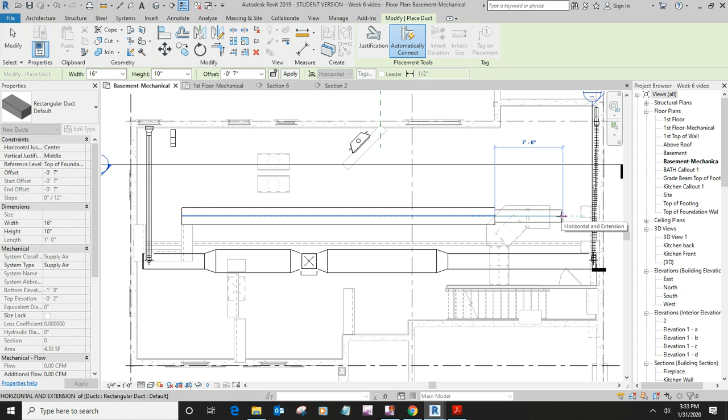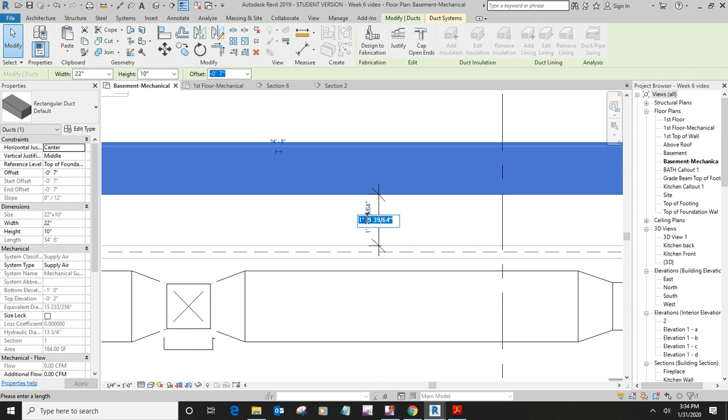Okay, and so I put my transition in. Now I need this to be off the edge of my beam. I need that to be about 4 inches off of the beam. No closer than that.

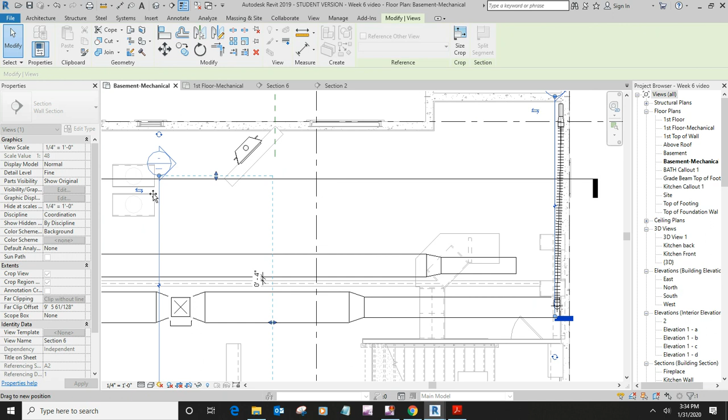All right, let's see, where's my sections at? So you can see that, about 4 inches, no closer than 4 inches off of that. All right, so now I want to put a vertical duct coming down, and we're going to do an elbow and then come into a piece of vertical duct underneath here. And we'll have the same problems that we had earlier, for sure.

So let's start with our vertical piece here. And that should be a 24 by 20, yeah, because the bottom of the furnace, we're going to go with a 24 by 20.

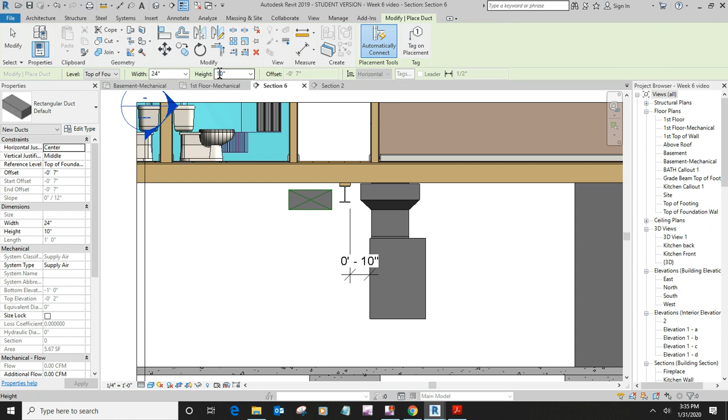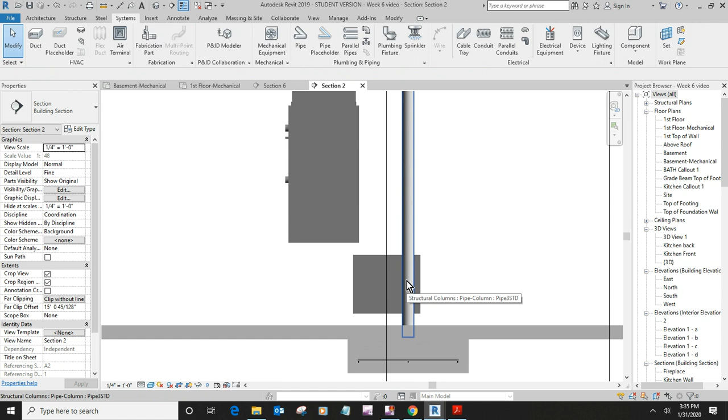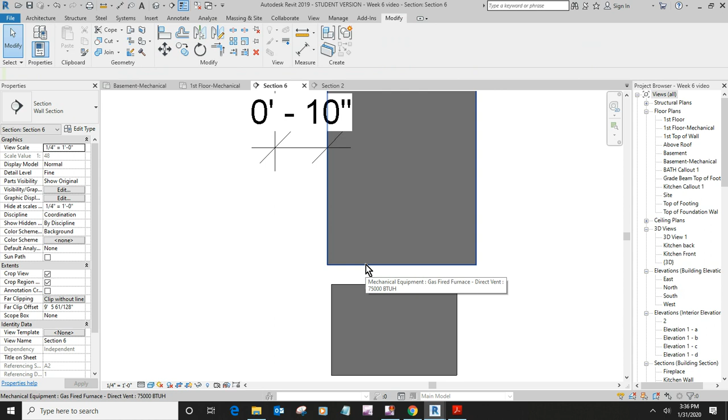And I'll pick the connect point, but then I'll come down below it a little bit and come down like so. Now I want to check my other section. All right, and I'll go back to this section. Ooh, that lined up pretty close. Okay.

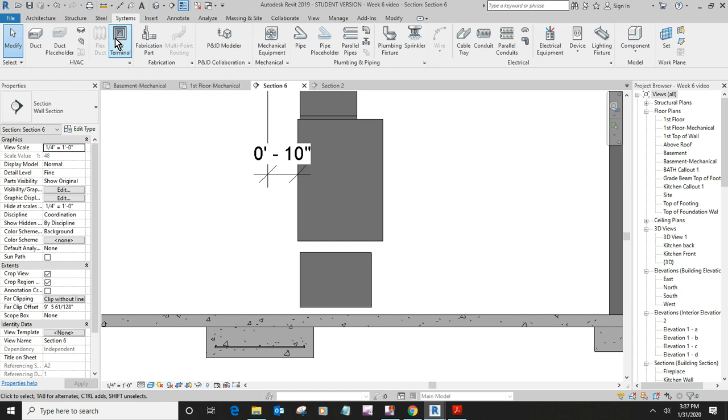Now let's drag it down, and we'll go ahead and put a cap under it. Oh, and I had trouble with this thing. I kept having trouble with it wanting to snap to the other end of it. So I had to physically place one and then just join them together.

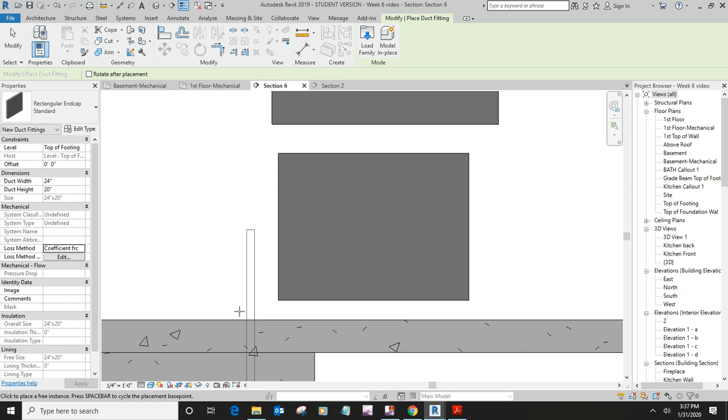So we'll make it 24 by 20. And instead of attaching it to the duct, rotate after placement. There. And now we'll do some alignment in that I want it actually on the floor.

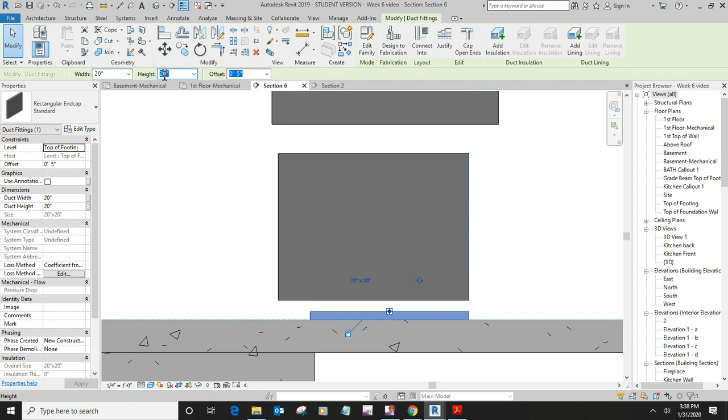Okay, so now I need to change my size on it, because of the way my duct is, and make it a 20 by 24. There we go. I didn't check my other section.

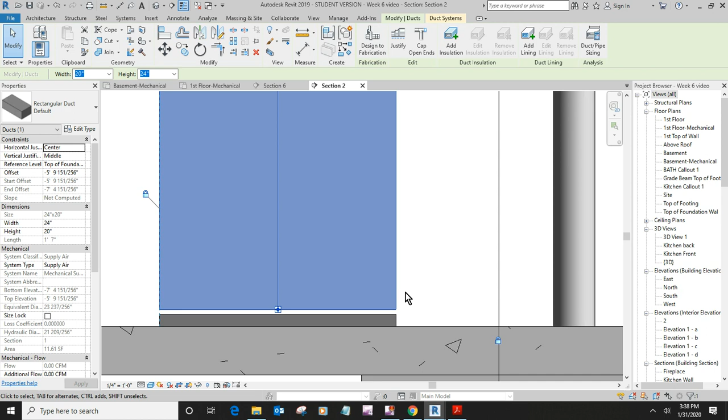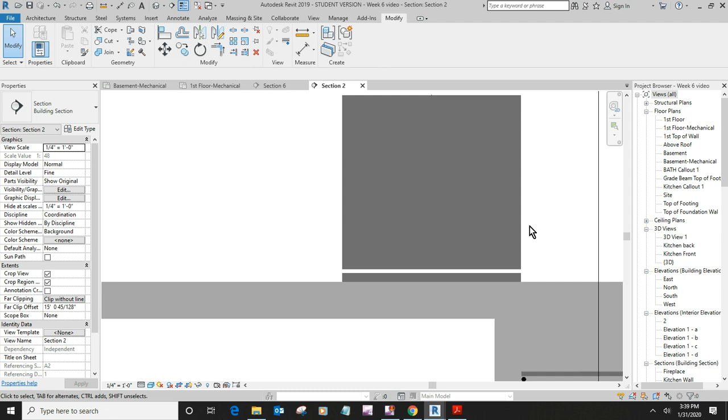I don't know why it did that. Constraints not satisfied. Because it keeps wanting to put it up on the very top. Okay, so good old align tool.

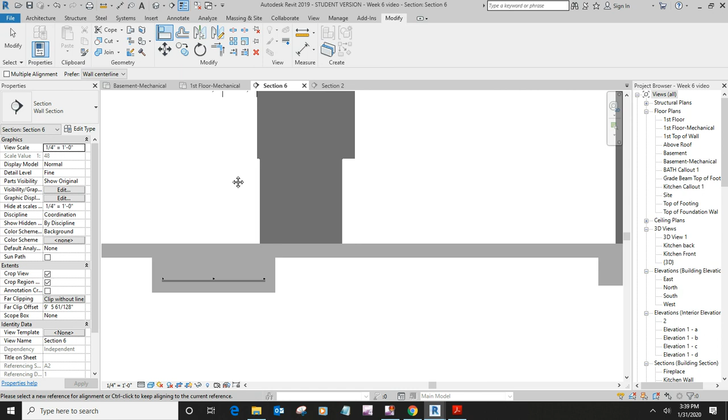And I know if you talk to somebody that does HVAC design in Revit, they're going to laugh at me and tell me how stupid I am. But we're rolling with it. All right, okay, so now we've got that done.

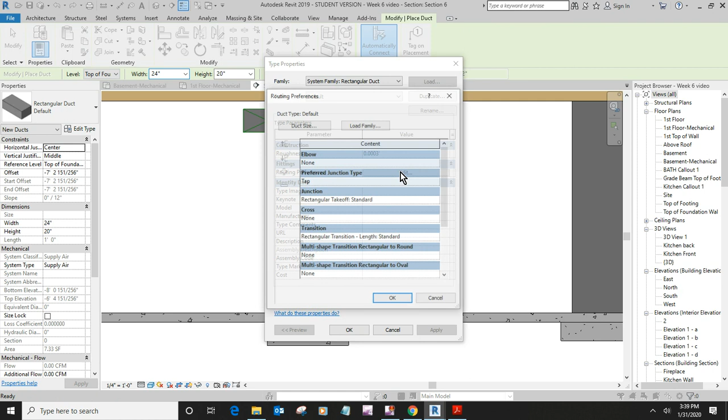Now we're going to pull a piece of rectangular duct down, come down and do a 90-degree turn and come over, and then we'll drag it into that and connect it. So let's go duct, rectangular, and let's edit our routing preferences. And we're going to add an elbow to it now.

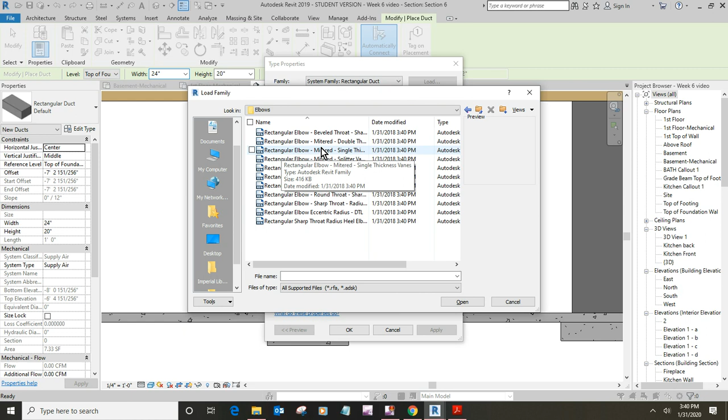Got a load of family. Duct, went too far. Fittings, rectangular, elbows. And I want this one because I like that one. It's a mitered single wall. It worked good for me. So I'm going to choose a rectangular elbow mitered single thickness vanes and add it to there and go okie dokie.

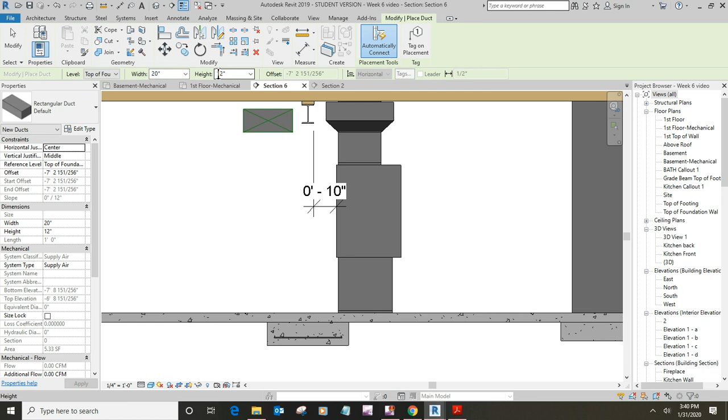Okay, and my size, let's see, I'm going with a 20 by 12. Let's see, maybe it should be a 12 by, yeah, it should be a 12 by 20. There we go. And I will start it there.

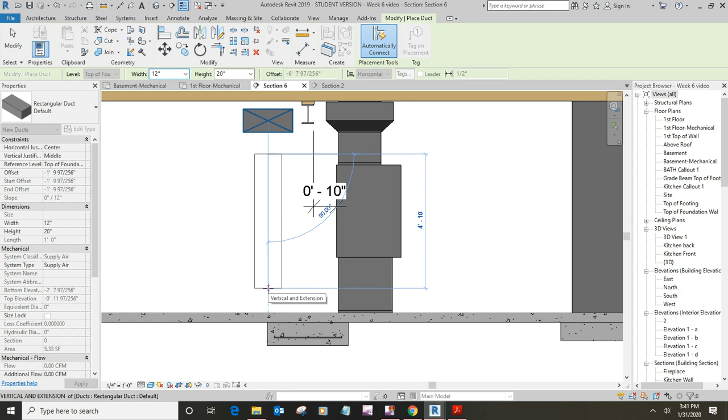It still didn't do it right. There we go. Now I'm going to bring it down, you know, a foot or so off the floor and turn and come this way, but I'm not going to join it yet. I just want to do it to get my elbow in. Now I'm going to go back to this section.

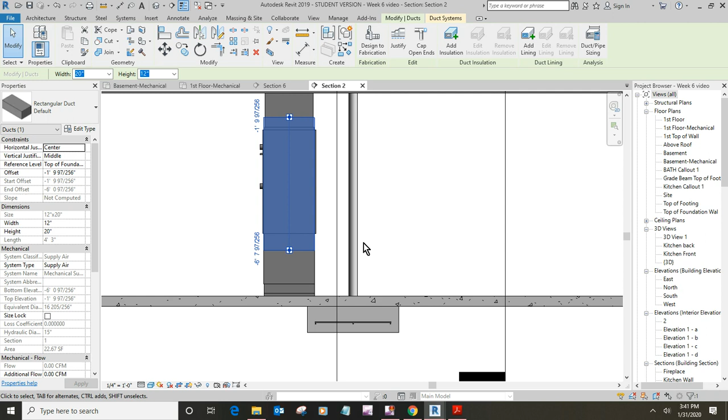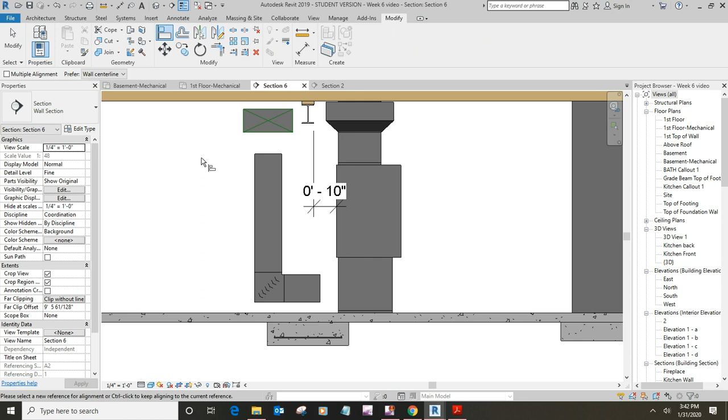And now I can align those together. Like so. And we'll come back to here, and now we'll connect things. By dragging it in, it doesn't put a takeoff on it.

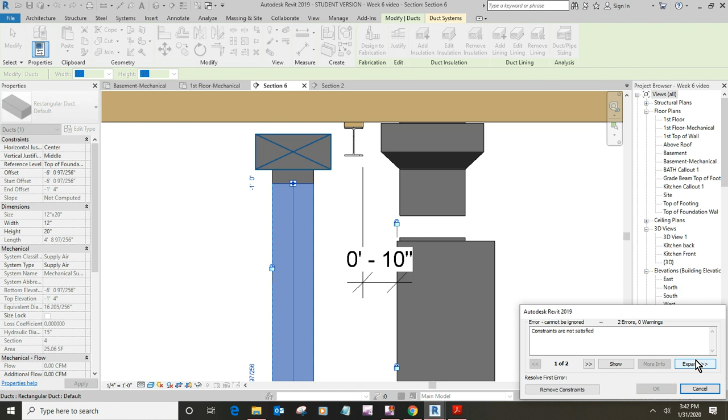What's the furnace got to do with it? Mm-mm. That one worked. Wonder why this one didn't work. Hmm.

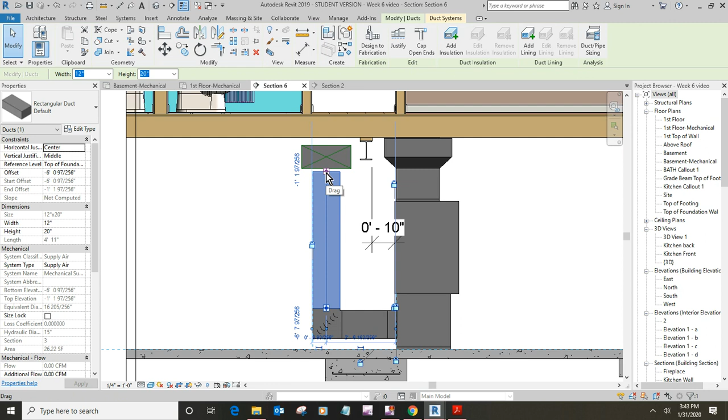Let's try something unusual here. Nah, it didn't work. Okay. Hmm. Okay, we'll just roll with it. So we'll just drag it into the inside. Ah, I don't really like that, but that's how it worked. Okay, so that's got my vertical stuff going up.

Now on your return air, we're going to have three different return air registers. One is going to be in this hallway right here. One will be right here by the stairs, and the other will be here behind the dishwasher. So you'll put those three in. The only difference between them and the supply lines was that they were an 8-inch round duct.

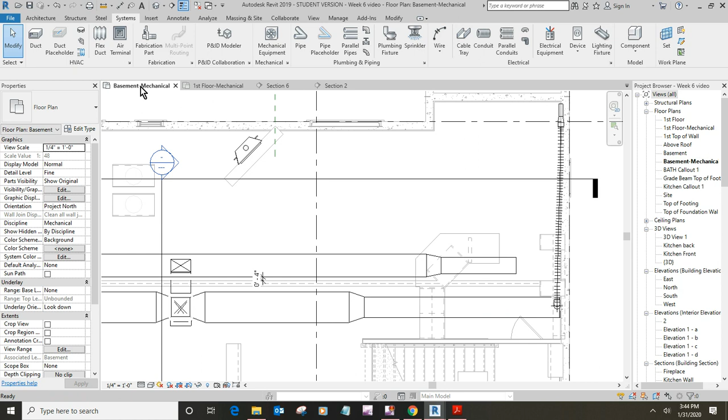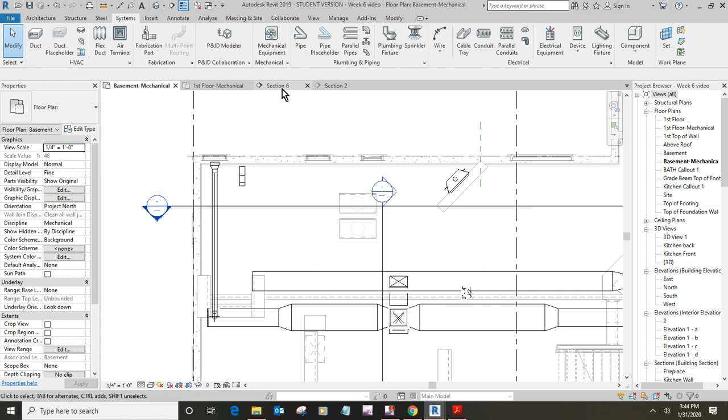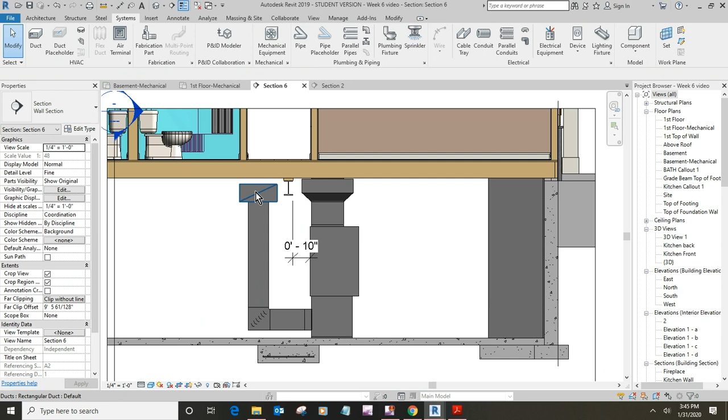One thing I did forget to mention was that when you're running this, it should be return air. And then check. Check all of those. Okay, so that's looking good. So all of those should be tagged return air along with your ducts that are running through.

Now when you're placing your return air lines, we got the same way, we're going to do an elbow out of the top and then come over and join into the boot. So you'll do the same way, you'll place the boots first, line them up in a joist bay, and you go to a section view and draw your duct and bring it over.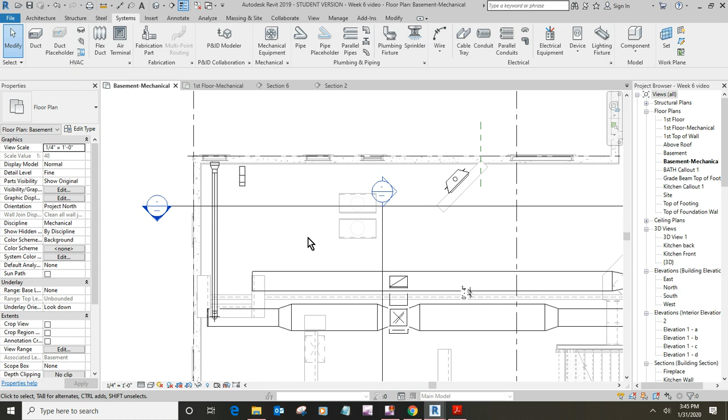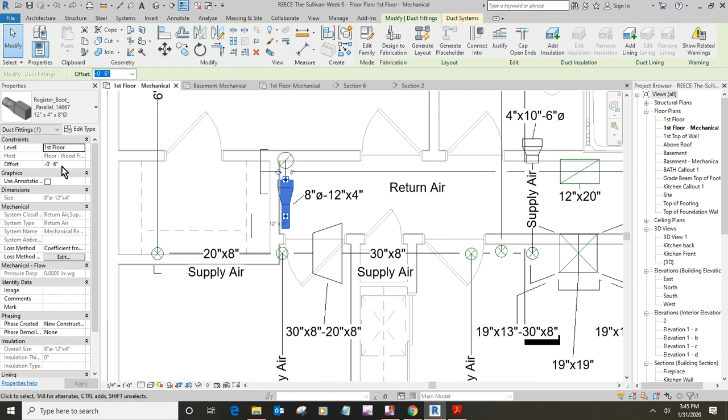So let me bring back in my finished product. And those boots should have an offset of 6 inches from the first floor level. Okay. Get that out of the way. And so that will take care of all of your return air stuff.

And then we'll look at how to place the registers, and then setting up your drawing to get all of that stuff ready.